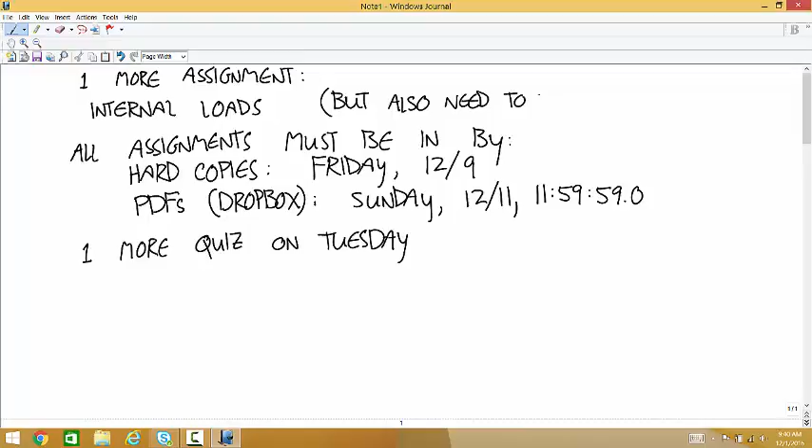And so, yeah, feel free. Anything you don't have in yet, get it in, and I'll give you full credit for it. Okay? I mean, if it's good. And then, what do we have left? Do we still have a quiz? On Tuesday, okay. One more quiz on Tuesday. And the one more assignment thing. There's one more assignment, but there's also one more set of things that you're responsible for on the test. You just don't have to turn them in. So you need to work through the friction problems. That's just not going to be submitted, but that's going to be on the last test. And then exam 5 is Thursday, 12/15 at 8 a.m.

Yes. Just have a question. What happens if something happened, like it was really snowing outside and my car was stuck? Because I'm always nervous about this. If I were you, I would just bring a sleeping bag on Wednesday. I'll bet you can find a place in the activity center where they don't look. It's not allowed, but I'm sure you can find somewhere to hide. I mean, I'm sure that they do have snow days, but I don't know. We've been pretty lucky so far this year. That would be the day, a snow day on finals week. That would be a disaster. I've been here 8.5 years now, and I've never had that happen. They don't close the school very often. Like, we never have snow days in Minnesota.

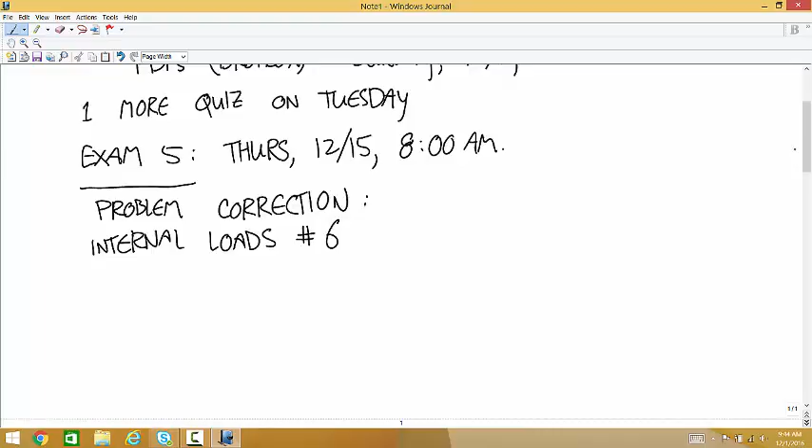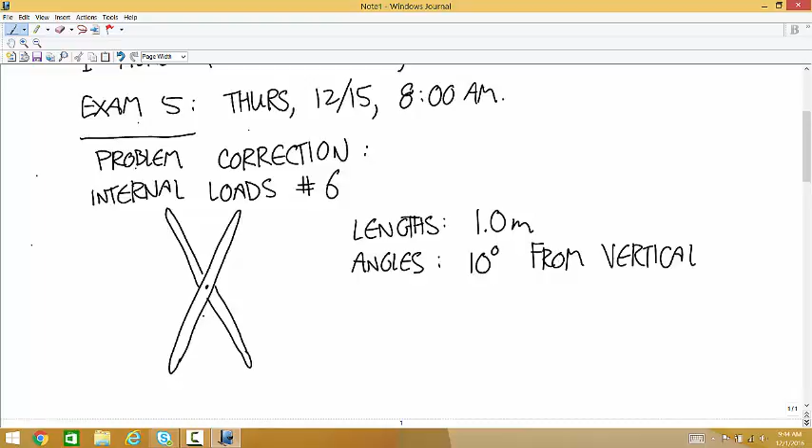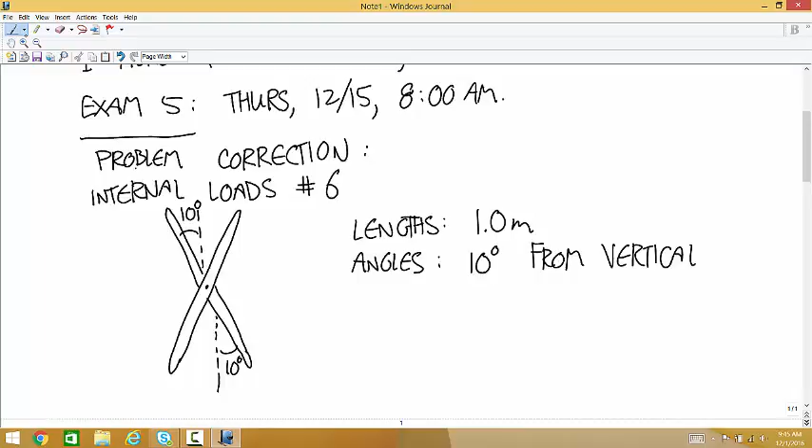All right. Any questions about any of the rest of the semester? Okay. There's one problem correction. I think it was number 6 in internal loads. It looks like you have these two members crossing. I don't remember a lot of details of the problem, but it doesn't give lengths and it doesn't give angles. So use the lengths being 1 meter, and the angles are both 10 degrees from the vertical. So this angle is 10 degrees, and this angle is 10 degrees. Do you happen to know what weight I used in the solution? Yeah, 400 kilograms. It's just a single beam. So the mass of the beam is 400 kilograms.

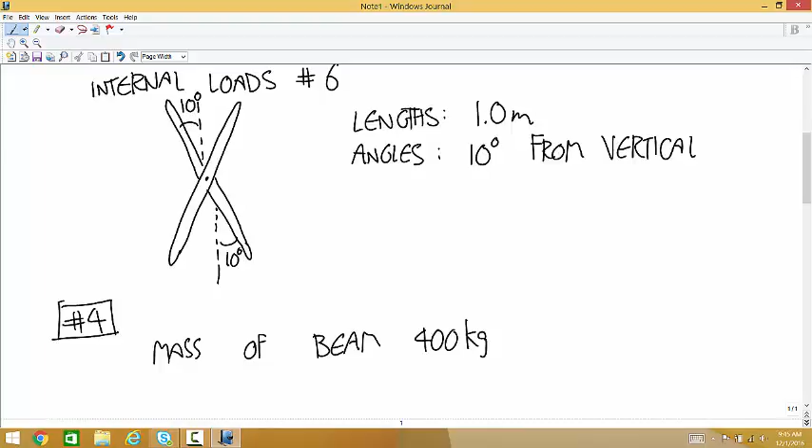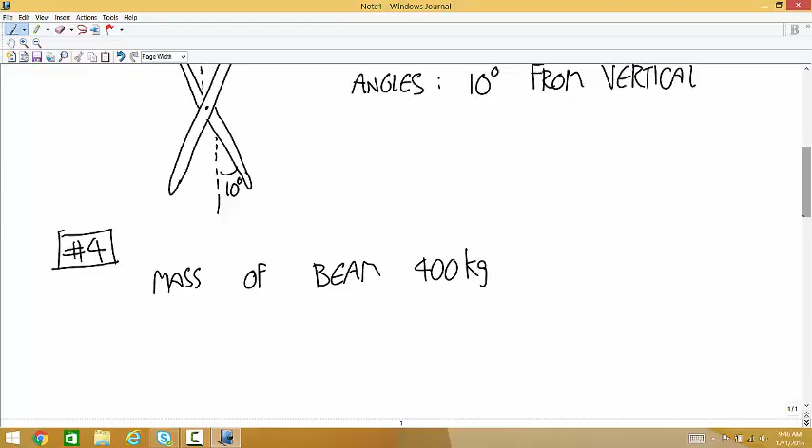That's a really heavy beam. Yeah, exactly. I guess what that means is that it extends into the page, most likely. Like you could have a wider plate made out of steel that could weigh that much. Yeah, but it gives it a length. It's just a 1 meter beam that weighs 400. So it has to extend into the page, exactly. Or be made out of neutron star. Okay. Any questions about assignment problems? All we have left to do is friction, and that shouldn't be too hard to get through in 3 classes. Anybody have it sitting in front of them? Internal loads?

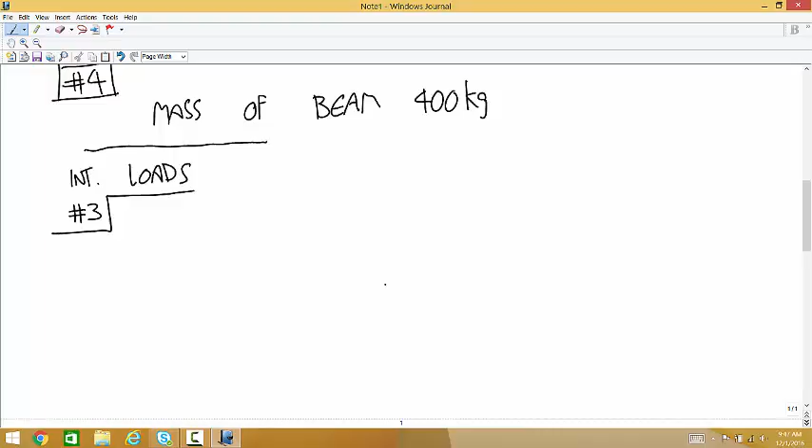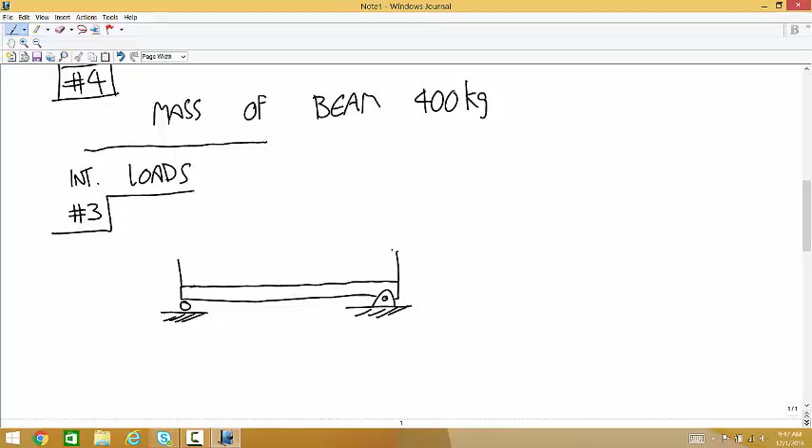3 is the one where it just... Okay, so there's a pin joint on the right side, a roller on the left side, and a rectangular distributed load all the way across. And there's no weight. The length is 3 meters. This is 10,000 newtons per meter.

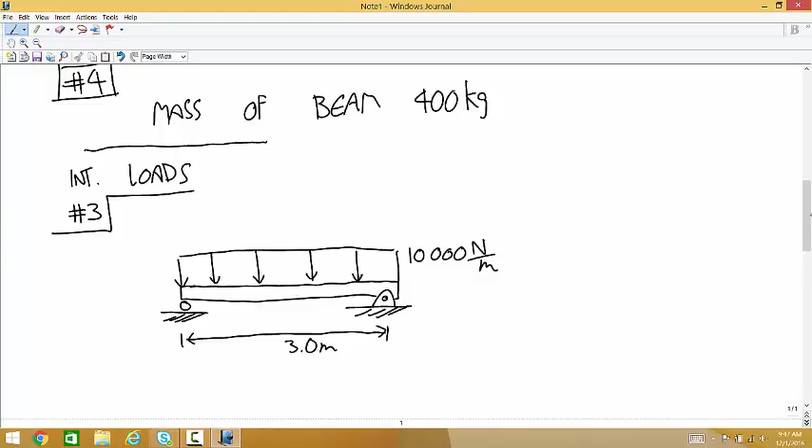The first thing you have to do is calculate the external loads. So if you think of this distributed load as a rectangle with a height of 10,000 and a width of 3, not drawn to scale, the total area is 30,000 newtons. The centroid's right in the middle.

So a free body diagram of the whole thing. At the pin, we have a full force vector. At the roller, we have a force pointing up. And then at the middle, we have a downward force of 30,000. Is it just safe to assume that that roller is right on the end? Yes.

So now you can write out the table, or for these horizontal ones, it's not too hard to just think through what's happening. So that's what I'm going to do. But with any rigid body problem, you can always write out that table if it helps you, including when you do those cuts, each one of those is a rigid body problem, and you can write out the table for those if you want to. This is sort of a shorthand. I'll put the about point here for the external loads.

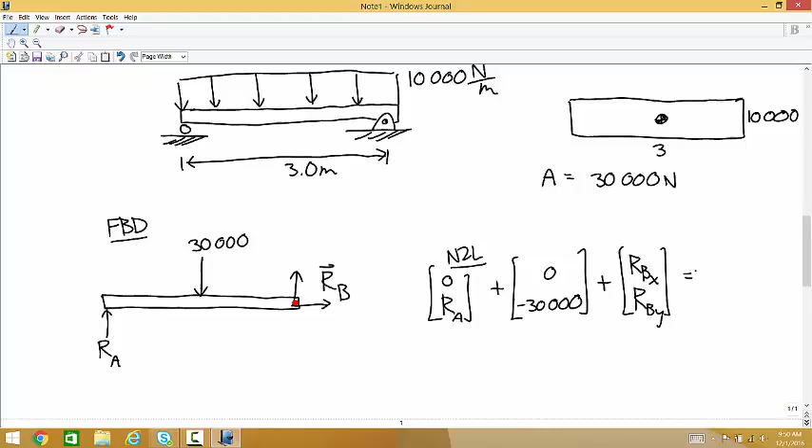So Newton's second law says (0, RA) plus (0, negative 30,000) plus (RBX, RBY) is equal to zeros. And the moment equation, there's no moment produced by RB. The 30,000 has a moment arm of 1.5. And would that produce a clockwise or counterclockwise moment around this hinge? Counter, so that's positive.

Wouldn't that be negative 1.5 with our coordinate system? Don't think of the coordinate system if you're doing it shorthand like this, by inspection; don't think of the signs of these values. Just think of magnitude, and then do the sign based on the rotation. Okay. And then RA has a moment arm of 3. Would that produce a clockwise or counterclockwise rotation? Clockwise, so that's negative.

So RA is 15,000. So RB is 15,000. Well, actually, I should have been able to see that. That's all just because of symmetry. Those have to be the same, and they each have to take half of that load. And so the vector RB is (0, 15,000).

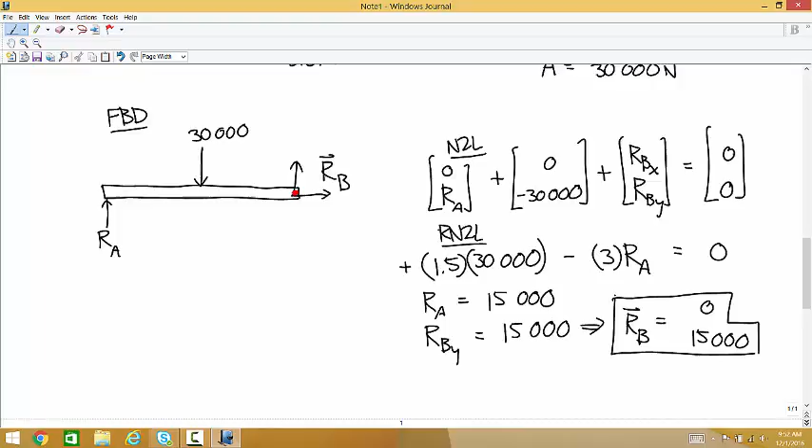Okay, so now the biggest danger to screwing up the cuts is that the last picture you drew is trying to mislead you about where to make your cuts. You look at this picture and you think endpoints and a point force in the middle, so that's n equals 3, you need 2 cuts, but that's wrong. This force in the middle is not a real force. That's a mathematical thing that we use to solve the problem.

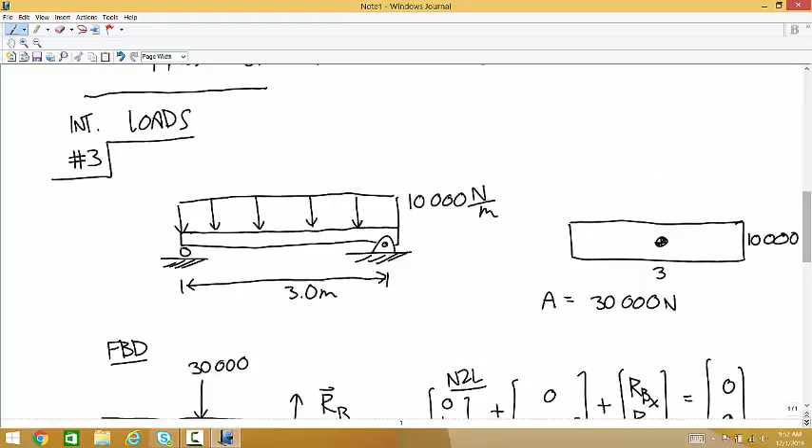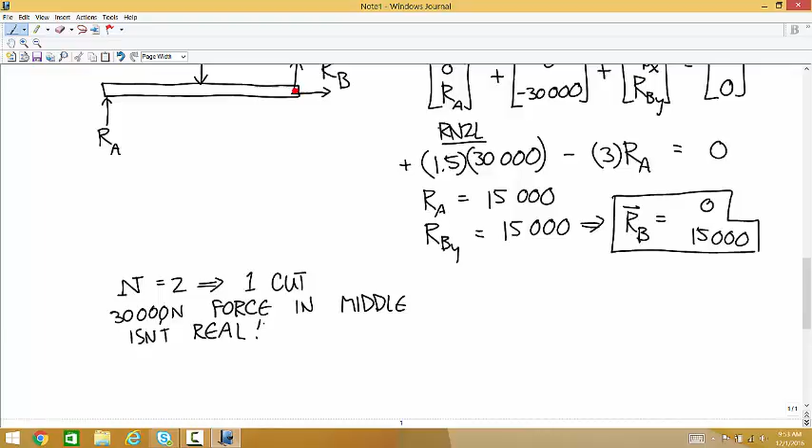So the real answer for how many cuts you need comes from the picture, or from a free body diagram before you treat that distributed load as a point force. And so based on this, we have the 2 endpoints. The distributed load function never changes, and so n is equal to 2. We only need 1 cut. That 30,000 Newton force in the middle isn't real. Okay, so our cut is valid for all x values. And I'm going to draw this in 2 steps.

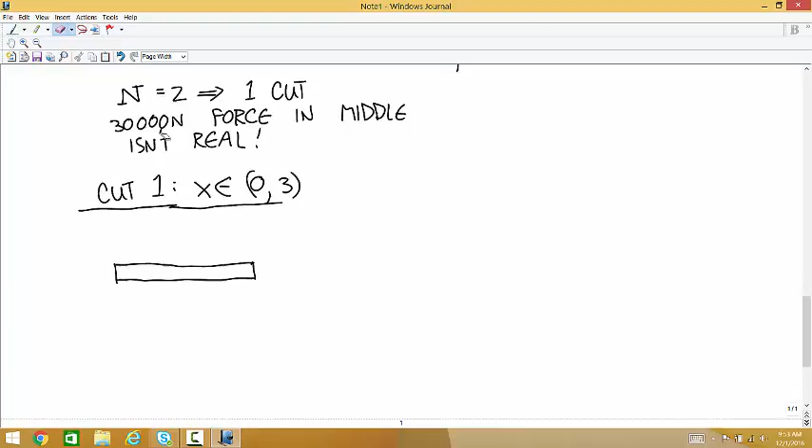Yeah, because there's not really a point force applied at the middle of this beam. There's really a distributed load. And so each time we choose a new cut, we have to treat this as a distributed load. So is it all over the beam, or we choose it to be a point force, but in reality the distributed load is all over the beam?

Right, it's all over the beam, and so we only go from the distributed load to treating it as a point force once we've chosen the cut, once we've chosen what body to isolate, which means every time we go to a new cut, we have to think of it as a distributed load again and recalculate what that point force is. Okay. Yep.

This is kind of piggybacking on the structures, right? When we were coming up with an overall force, typically that force is kind of prorated, or at least averaged along those given intervals we were calculating for, correct? So if you had something like 15,000 Newton meters over, let's say, 3 points, that would be theoretically 5,000 Newton meters at each point. Yes, that's right.

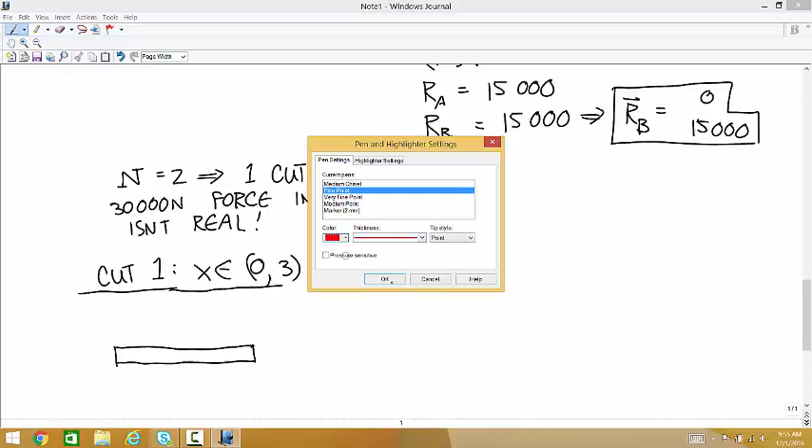Okay, so for the first cut, we're ignoring all the stuff going on here. You know, there's all this beam that we're not considering, and that beam includes part of that distributed load that we're not considering. We're only considering this piece and this piece of the distributed load.

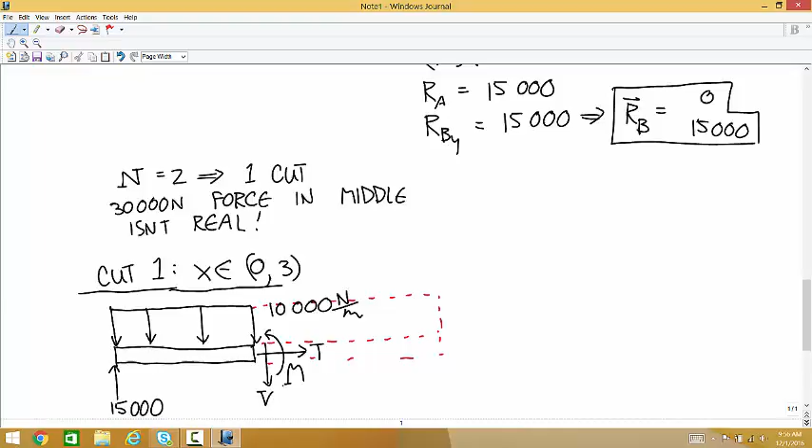Since this is a constant distributed load, a rectangular distributed load, the magnitude is 10,000 newtons per meter. We have an upward force from the roller of 15,000. And then we have the internal loads. And now that we've chosen a body to isolate, this point here is x equals 0. This point here is some arbitrary value of x that has to represent any choice between 0 and 3.

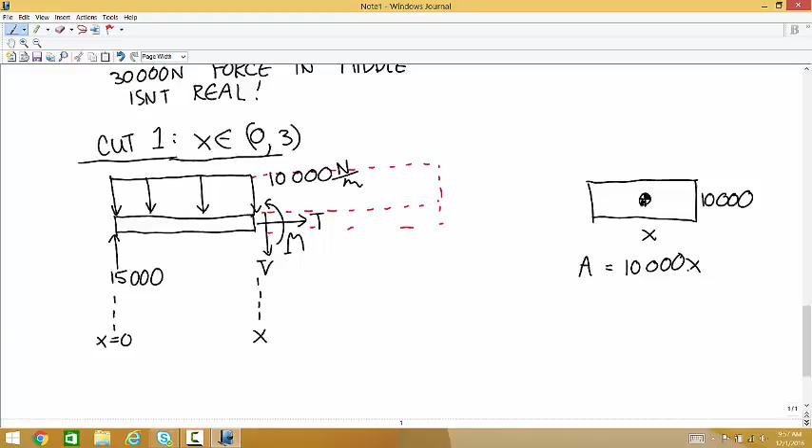So now our distributed load looks like this. This rectangle has a height of 10,000, a width of x. The centroid's right in the middle, or in other words, x over 2 from either end. And the area is 10,000x. So now I'll redraw this. We have a downward force of 10,000x.

Newton's second law says (0, 15,000) plus (0, negative 10,000x) plus (T, negative V) is zeros. So there's no tension. V is equal to negative 10,000x plus 15,000.

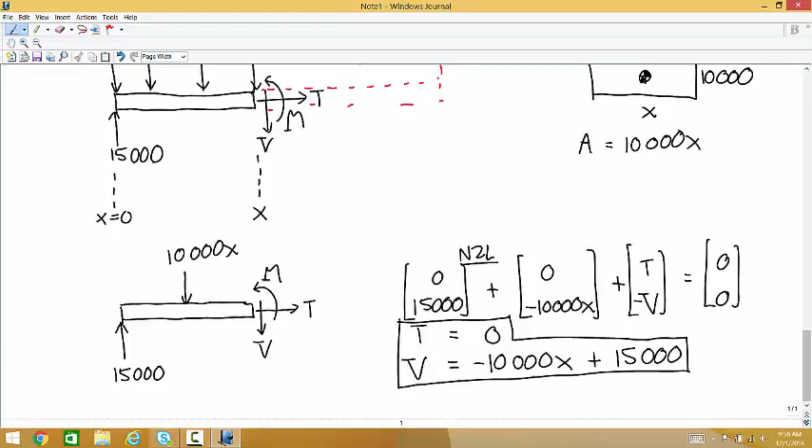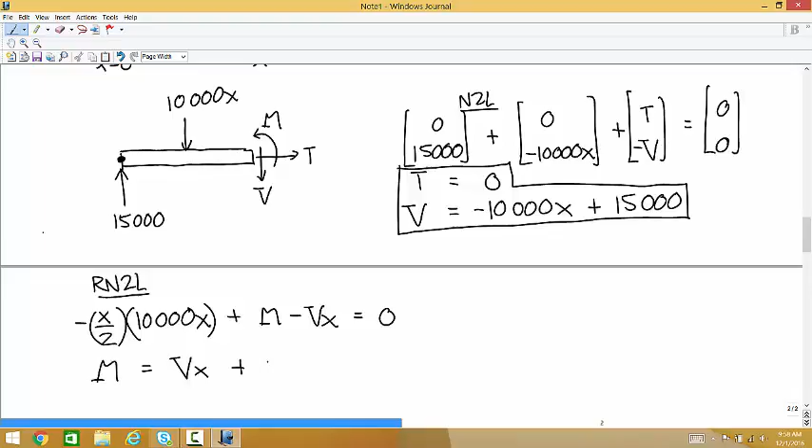And then the moment equation, our about point is over here, like always. So the 15,000 doesn't produce a moment. The 10,000, what's the moment arm for that 10,000? x over 2. Anyone have any questions about that? The magnitude of the force is 10,000x. Is that clockwise or counterclockwise? Clockwise, so negative. Yeah, because it's a new about point now. M minus Vx is equal to 0. So M is equal to Vx plus 5,000x squared.

Substitute in V here, and you get negative 10,000x squared plus 15,000x plus 5,000x squared. When you add up the negative 10,000x squared and the positive 5,000x squared, you get negative 5,000x squared plus 15,000x. Do the derivative checks. dM/dx, negative 10,000x plus 15,000 equals V, so that one works. And then dV/dx is negative 10,000. Negative dV/dx is positive 10,000.

And that's the q. We choose x as an arbitrary length, like we chose it in the middle before, but now we choose it any length between? Right, it has to represent this whole interval of lengths in between those key points. Yeah, like 0 and 3, but it could be any length? Yes.

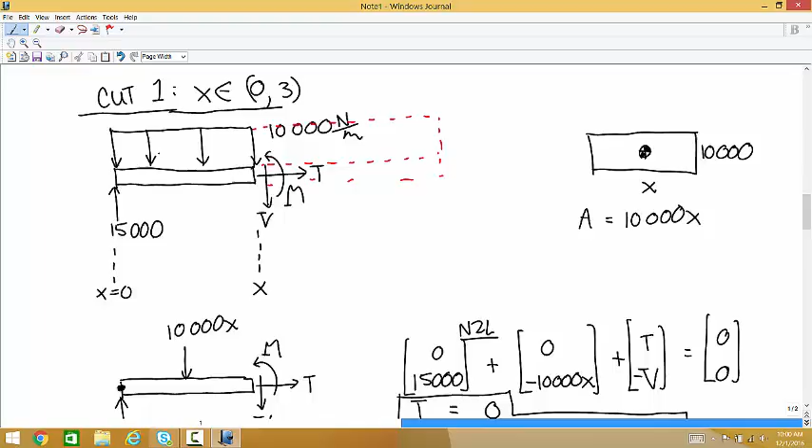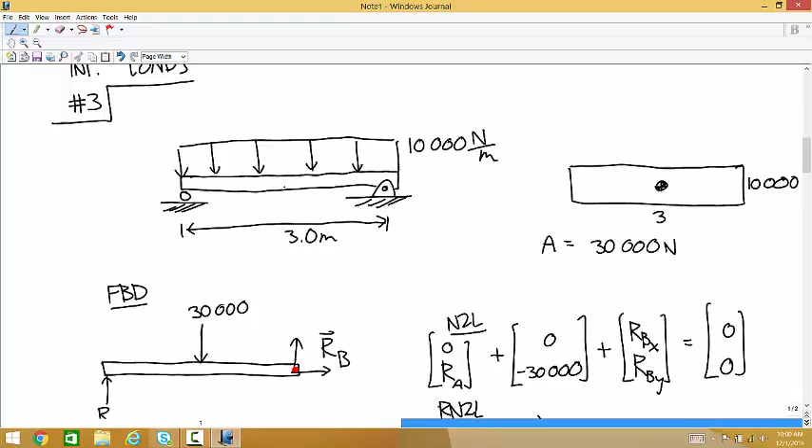So what this says is that, well, I don't even want to have the internal loads for the whole thing. I only want the internal loads at x equals 2.4. And so then you plug 2.4 in for x, and it gives you the internal loads at that point. And if you go back to the first example we ever did, before we started representing these lengths as x, we just chose a value and calculated the internal loads. If you did it that way, just did it as x equals 2.4, you'd get numeric values, and they would match what you get from these functions by putting 2.4 in.

Yes? Where did the x over 2 come from? That came from the centroid. So this is x equals 0. This is x. The centroid's right in the middle, so it's like the average of those two values, so x over 2. You know, either one of these two distances is x over 2. Any other questions about that one? Any other internal loads questions?

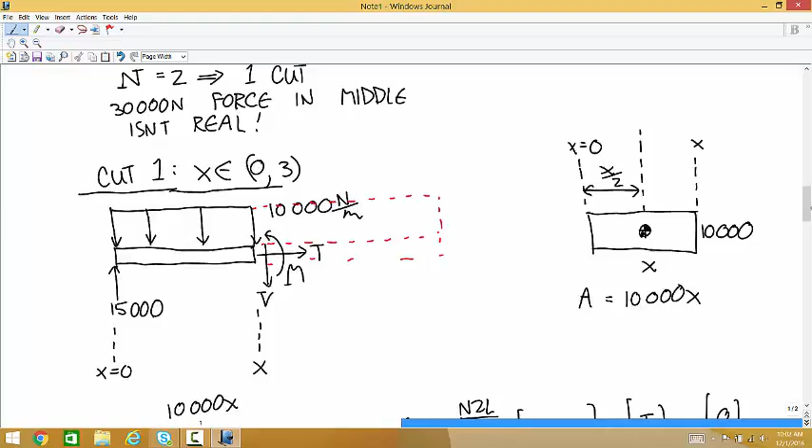Yes? Yeah, so 3B, the beam is cantilevered on the right. That's what we always like to see because it means we can be lazy about calculating the external loads.

So just a quick question. The last example, when you say calculate the T, V and M diagrams, is that what we're looking for? Then plot them? Oh, one says calculate, the next says graph them. Actually, yeah, that wording is weird. Like, do you want us to calculate those functions or draw the diagrams? Whichever one you want on that one. The wording isn't good. You don't have to do the diagrams for that one. Do the diagrams for the ones where it says graph it out. But don't do it by hand. That would be insane. Just go to like Desmos or use Excel or something and plot those. You know, use a plotting function to do that.

I don't have it in front of me. What about it? But like 3A, B, and C said to calculate. Yeah, so any that say calculate, just do the functions, that's fine. The ones where it says plot a graph or graph the functions or whatever, give me the graphs on those. But yes.

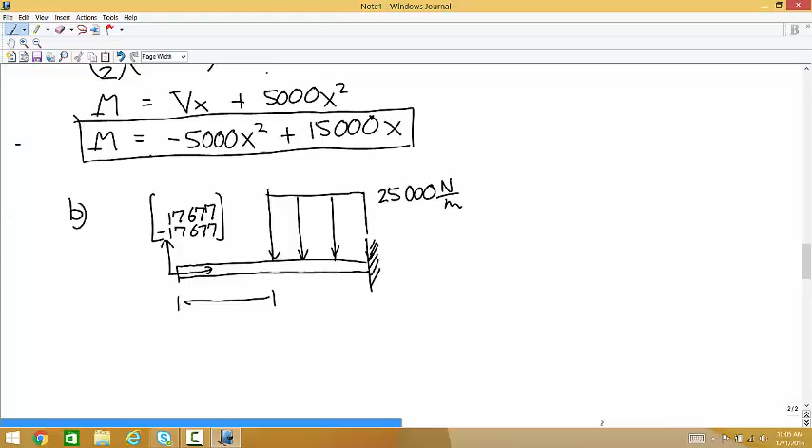Well, we can right now figure out how many cuts we need to do. So there's the two endpoints. And then in between the two endpoints, are there any point forces? No point forces. Any places where the distributed load function changes? This one, that distributed load does change at the middle. So n is equal to 3, and so we're going to need 2 cuts. And like I said, we can skip the external load calculation and just go right to the cuts. So cut 1 is for x values between 0 and 0.5.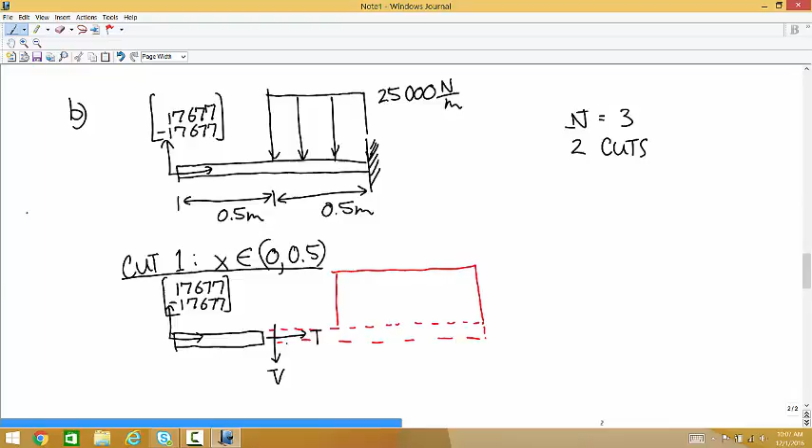So we're leaving off a whole bunch of beam, and we're leaving off the entire distributed load. All we have acting are the point force on the left and the internal loads. So Newton's second law says 17,677, negative 17,677, plus T, negative V is equal to zeros. So T is equal to negative 17,677. V is equal to negative 17,677.

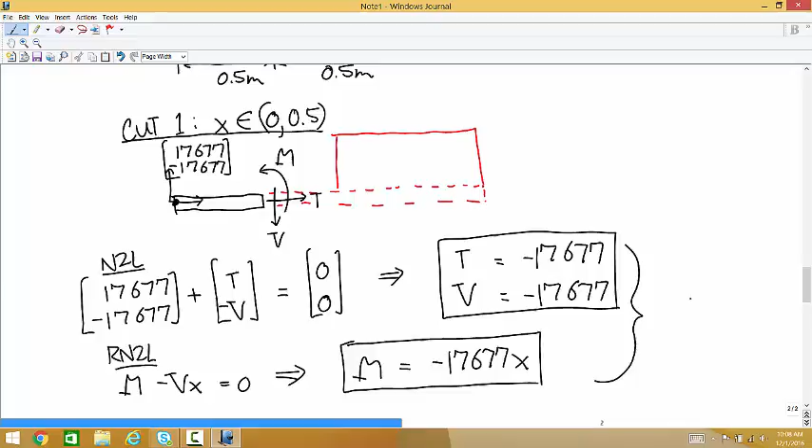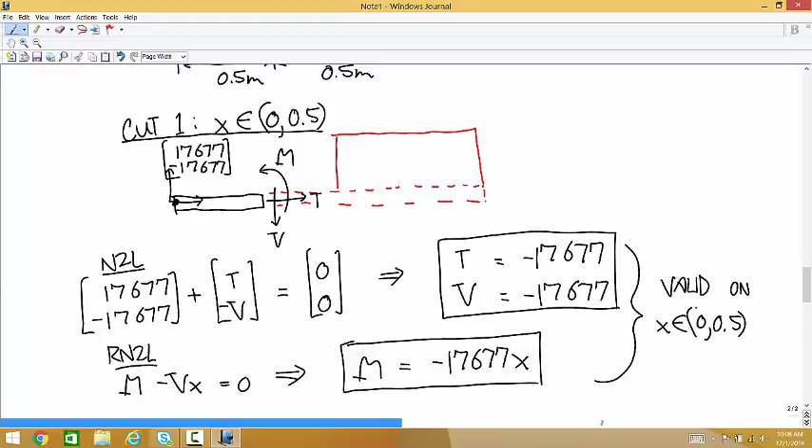The moment equation, the about point is at the left, so all we have is plus M minus Vx equals 0. So M is equal to negative 17,677x. M is equal to Vx, and then V is negative. And these are valid on the interval x between 0 and 0.5. And then the second cut is valid for x values between 0.5 and 1.

We're leaving off some amount of beam like that. And so we have the force over here at the left, 17,677, negative 17,677. We have the distributed load of 25,000. And then we have the internal loads. And now that we've made the cut, we can treat that rectangular distributed load as a point force. It has a height of 25,000.

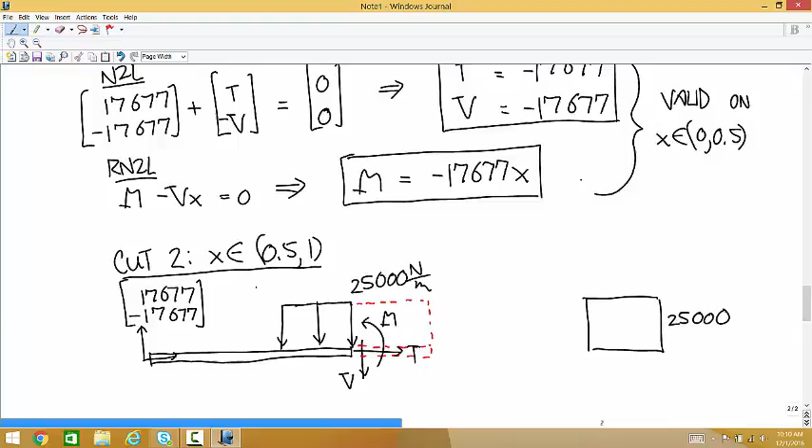Its width, you have to think about it a little more this time. So let's think about these locations. This is x equals 0. This is x equals 0.5. And this is x. So what's the length of this rectangle? X minus 0.5. And the centroid's in the middle. So if the centroid is here, what's the distance between x equals 0 and that centroid?

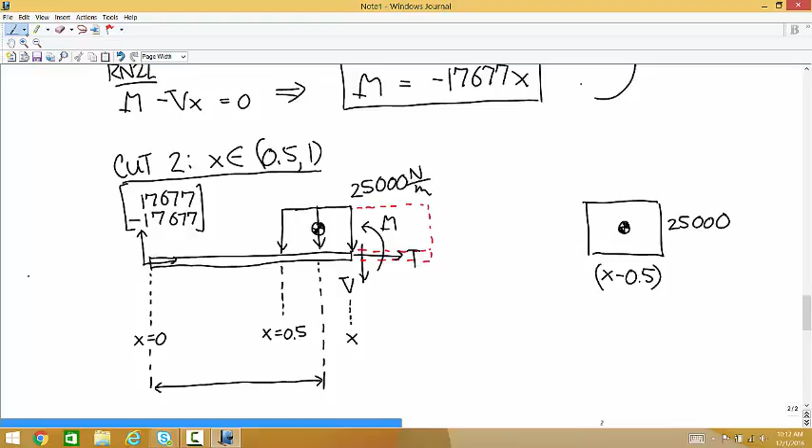That's right. So there's two ways, I think, that make sense to think about it. One is where you think it's 0.5 plus half of that length. And the other way, the way I like to think about midpoints, is just average the 2 points. So the average of 0.5 and x. So this length then is 0.5 plus x divided by 2, and the area of that rectangle is 25,000 times quantity x minus 0.5. That's 25,000x minus 12,500. And I'm going to rewrite this one as 0.5x plus 0.25.

So now I'll redraw this piece of beam. We have the force over here, 17,677, negative 17,677. And we have the point force that has a magnitude of 25,000x minus 12,500, where this distance is 0.5x plus 0.25. And then we have the internal loads.

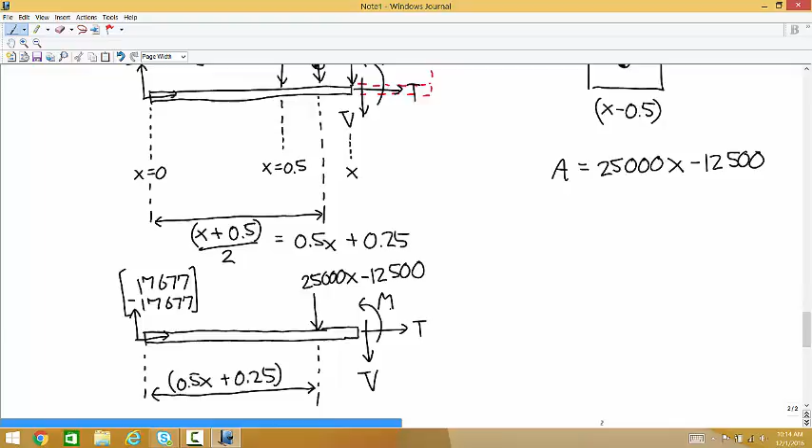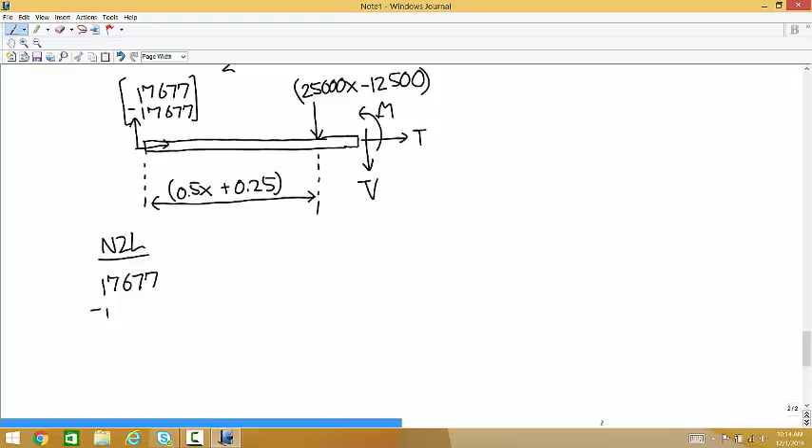And you're going to have to distribute out these polynomials when you calculate the moment, because you're going to have this moment arm there, this force there. But I think you're up to it. Remember FOIL? Okay, good. So Newton's second law says 17,677, negative 17,677,

plus, okay, so now this is a magnitude. You can see this is a positive number and it's pointing down. If you get confused about whether that's a positive or negative number, plug in a value of x. So that's a positive number pointing down, which means we're going to multiply this magnitude times the unit vector 0, negative 1, which means that we have the opposite of this in the y direction. So I'm going to write it as positive 12,500 minus 25,000x, plus T, negative V.

So T is equal to negative 17,677. V is equal to negative 25,000x minus 5,177. Oh, yeah.

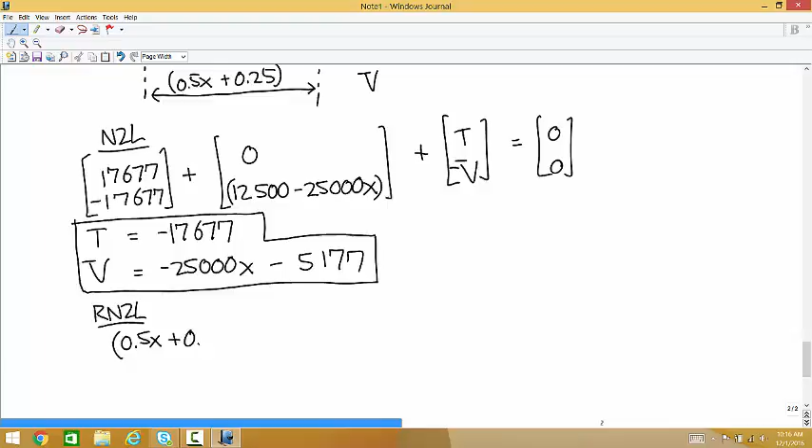And then the moment equation. This is our about point. No moment produced by the force on the left. But then we have this ugly thing. It has a moment arm of 0.5x plus 0.25. The magnitude of the force is this, 25,000x minus 12,500, then plus M minus Vx is equal to 0.

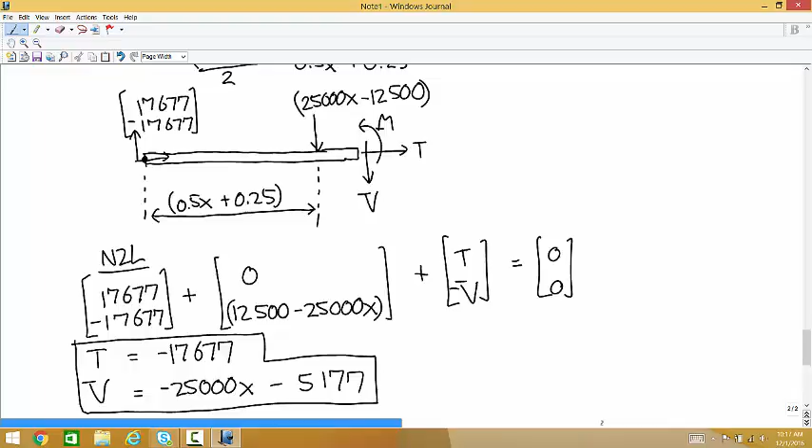So it's clockwise. Oh, yeah, I didn't think about that. Yep. So we have the moment arm, the force, and now we have to think about the direction of that rotation. That would produce a clockwise moment. So I didn't give that the right sign. Okay, that's probably enough. But yeah, so you have to FOIL that out, calculate M. It's just a lot of bookkeeping, algebra stuff. I ain't doing that.

Do we need to find the internal loads for number 2? It says reaction loads. The idea is the internal loads. It's more practice. It's worded wrong. So if you only calculate the external loads, I won't mark it wrong on your homework. But it's more practice. I think the solution calculates. Do you know? Have you looked at the solution for that one?

Okay. So the problem is, I rearranged a lot of these problems, and so some of the problems ended up in the wrong problem sets, little by little. It's a slow, iterative process to iron those things out. So that one was probably originally a problem for rigid bodies, and it just ended up here by mistake. Or it might be a problem for rigid bodies and you just forgot to add part B. Right. One of those two is definitely what happened, yes.

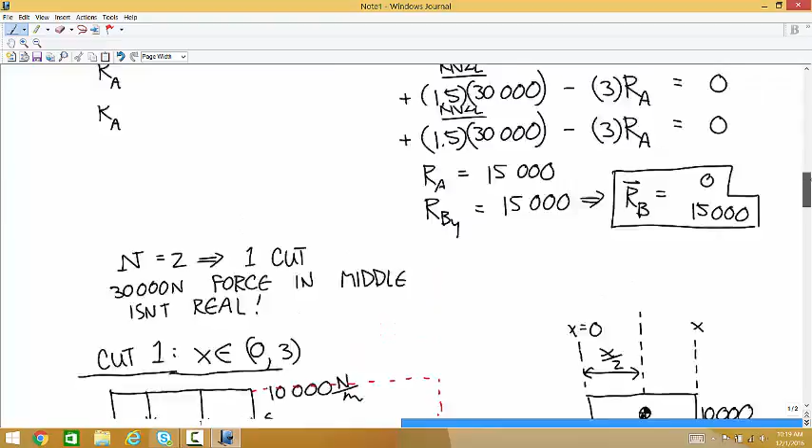So why do we have two cuts? We have distributed load and we have n equals 3, and the other one we have n equals 2. Because that n counts up these things: endpoints, point loads, well, it's counting up points. And those points add up if they are endpoints, and or locations of point forces, and or locations where distributed load functions change. And so in 3A, that distributed load function never changes. In B, that's the difference. So in B, that distributed load function changes at the middle from 0 to Q equal 25,000, and so that's why that point at the middle adds an n.

I was just going to wonder if there's any time you'd ever want to use a unit step function for something like B, for Q. Oh, I can't think of a way that would help, but I think that's just a difference in representation. So if you think about it and come up with a cool new thing, I'd love to hear about it. So if it's distributed load through the whole beam, we won't count it as a cut. Right. But because it's in the middle, like 3/4 or 1/4 of the beam, then we count it. Yes.

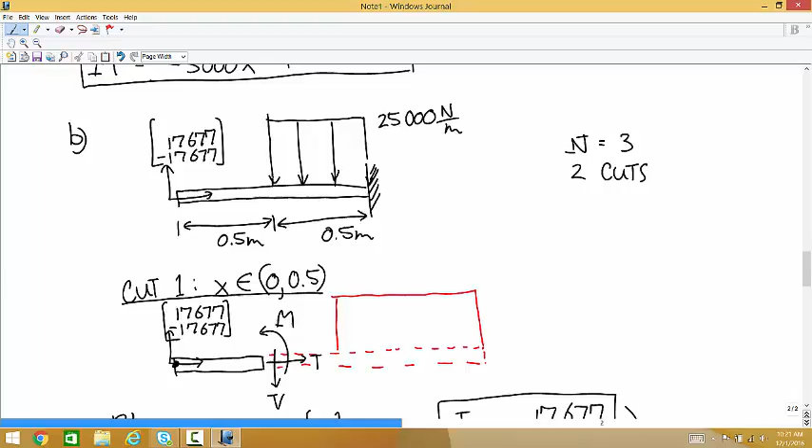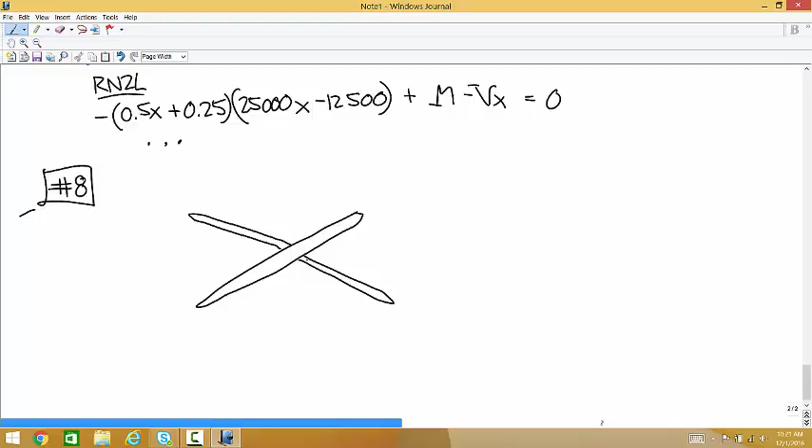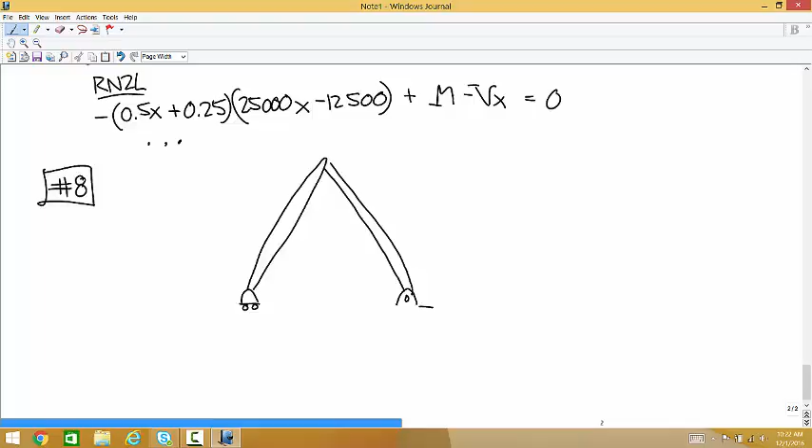I don't want you to do a whole question, but on number 8, they're on an angle, and I'm a little confused about the theta being rotated. Okay. So remind me, are they at sort of a shallow angle like this? Can I see it? Oh yeah, that's not it. It's a triangle. So it's a structures problem. These angles are 70 degrees. You have a downward force of 10,000. Horizontal force of 5,000.

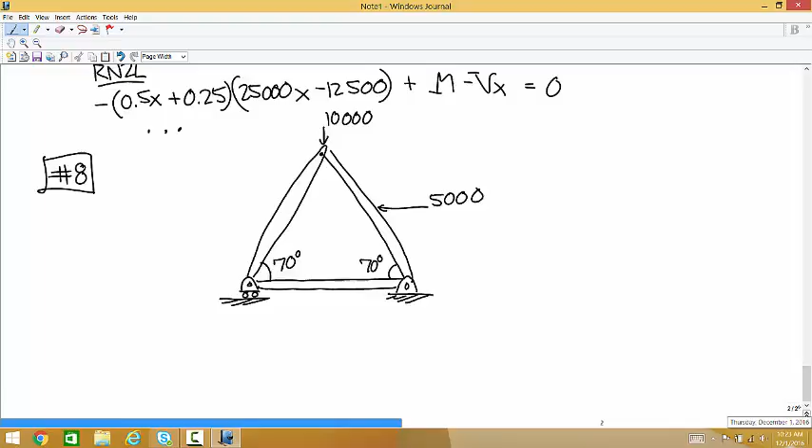So first you go, yes? Oh, in the solutions, which should I do? Okay. Yeah, there's that gap there like it's supposed to be. Okay, one more thing. So once you calculate the external loads, and these don't have masses, right? So you end up with one force down here. I'm going to just call that F1. Once you combine all these forces going on, it's a two-force member.

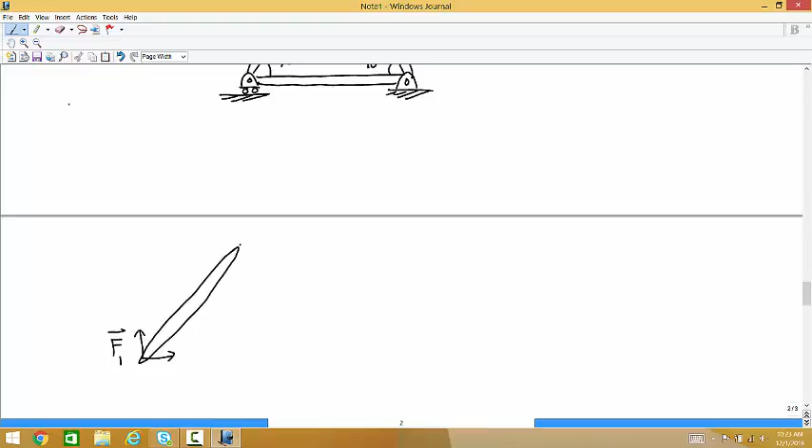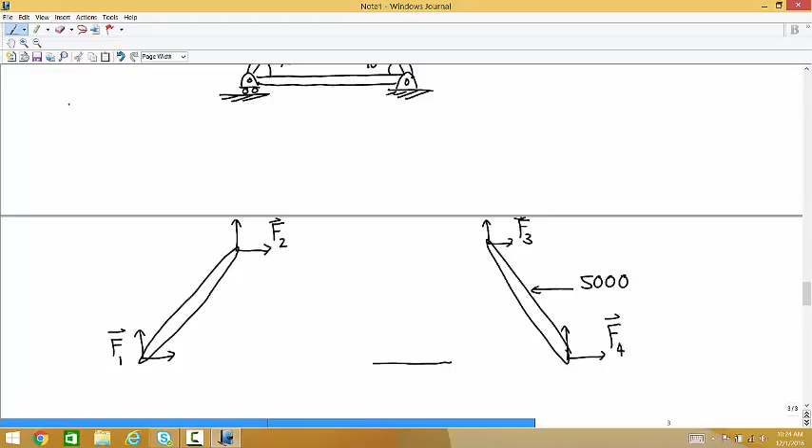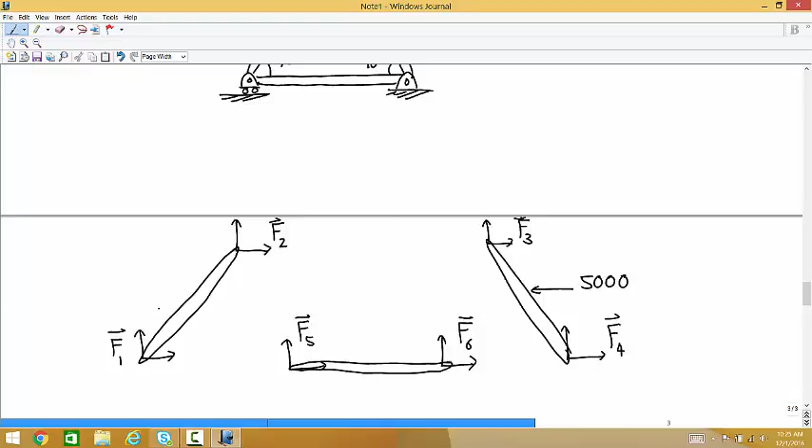Over here, you have F3, 5,000, F4. Yeah, everything's lumped together. So these are not the free body diagrams you would use to solve for the external loads. This is just what you have going on after you calculate the external loads. I have a question. Do we switch the coordinate system? Yeah. So for the next step, and that's what she was asking about. So let's call this member 1, this member 2, and this member 3.

So for member 1, okay, so for these members, is there anything you could do to sanity check your external loads? On 1 and 3, they need to be equal and opposite, and they have to be parallel to the beam. On 2, there's not as much you can do.

Do you need to include a force from the roller on the wall? Yeah, I don't know if I should have done the free body diagrams this way. So my idea when I did this is that 10,000 is lumped in here, the roller force is lumped in here. But what you end up with is external loads that when you add up all the loads acting here and you add up all the loads acting here, you end up with equal and opposite forces parallel to the beam. Same thing here.

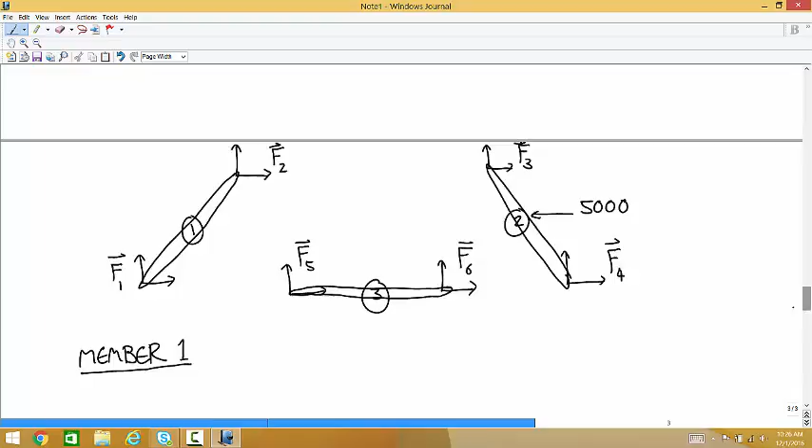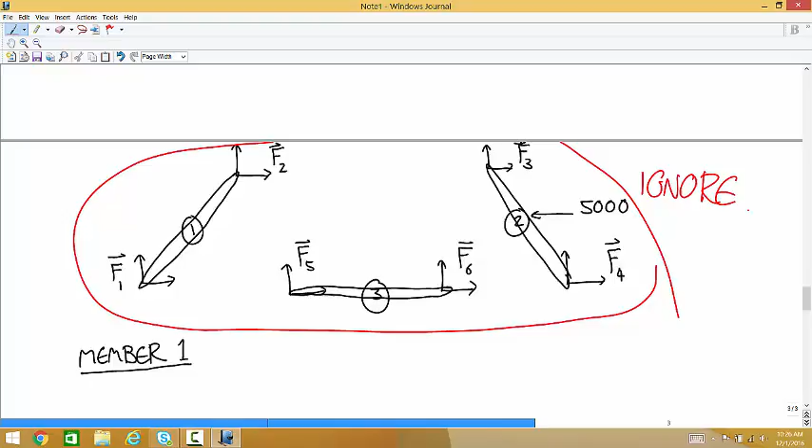Those are just space holders, yeah, right. So F1 and F2 are equal and opposite? Or number 1 and 2? Yes, you're exactly right. Okay, don't change anything you have been thinking about up until this point based on this diagram.

Okay, so member one, we're going from a coordinate system like this to a coordinate system like this. Most likely, although if you wanted to use this coordinate system, you could figure out that rotation.

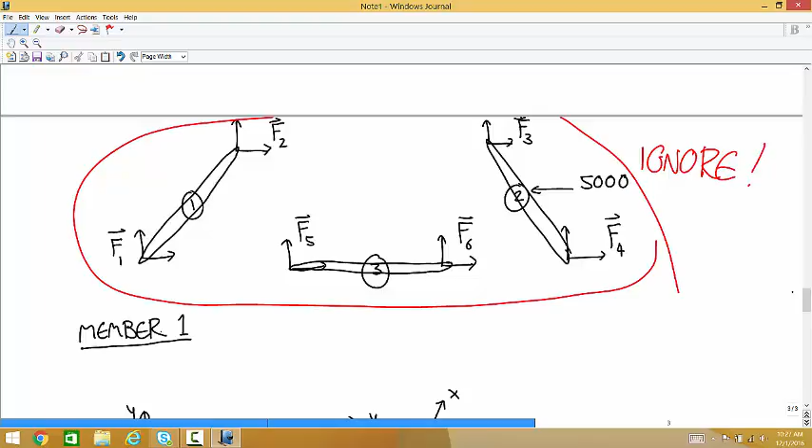You said X always goes in the line of the axis of the beam. Yeah, the X always goes along the beam. That's right. Doesn't matter which direction, right. But it always points from your starting, your X equals 0, your first cut, towards the end of the beam. So if you choose to do it with your x-axis that way, that has to be the left end of your beam when you start your internal loads. You know what I mean?

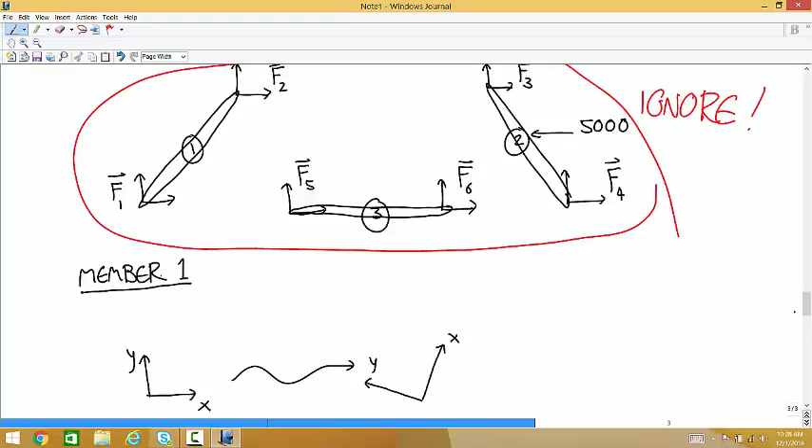Okay, so what's the angle theta for this rotation? Yep, positive 70. So why is it 70? Did it rotate counterclockwise or clockwise? Counterclockwise is positive. Oh, so it rotated counterclockwise. The coordinate system rotated counterclockwise 70. Oh, okay.

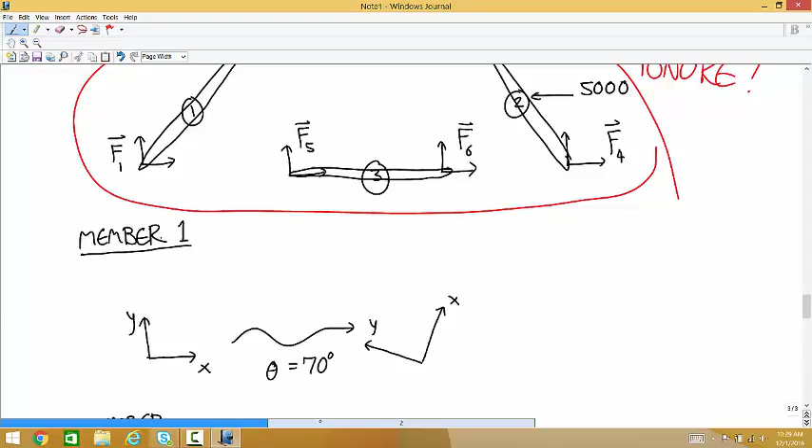What every single one of you is going to screw up at some point in your life is thinking that you want to take this beam and rotate it down like that. Yeah, when you rotate the coordinate system and then you turn your head, you don't rotate the member.

Okay. If any of you retire from engineering at 70 or whatever, and you haven't screwed that up at some point, let me know. You're optimistic. Yeah, let me know. And I'll give you something nice.

But this is something you have to keep fighting against actively, because your brain is going to want to do that. You're rotating the coordinate system, not the body. So basically, you have a system like that, you rotate it to the regular one, or vice versa? You're going from the regular one to the one with the x-axis along the beam. Okay, so if you're going this way, you're going right down. Oh, okay, I see why it's turned this way. This is because I saw the X and Y differences.

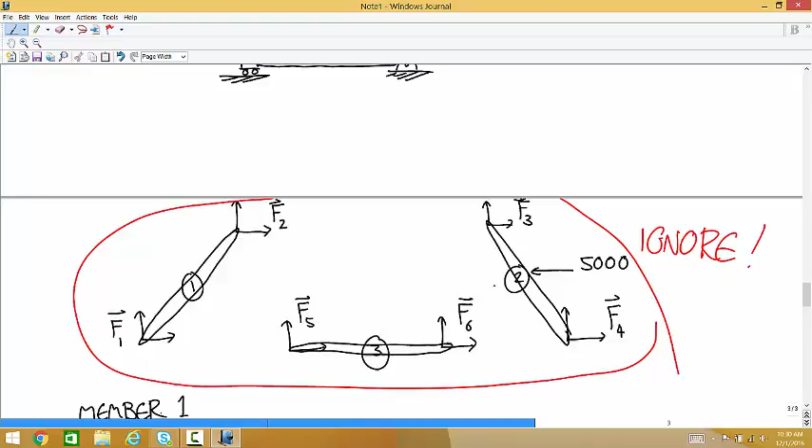Member 3, you don't have to rotate. Member 2, well, which way? You get to choose. I suppose, I don't know. I probably just always do it with the smallest angle I can, but there's no reason that that's any better or anything. So you go from this.

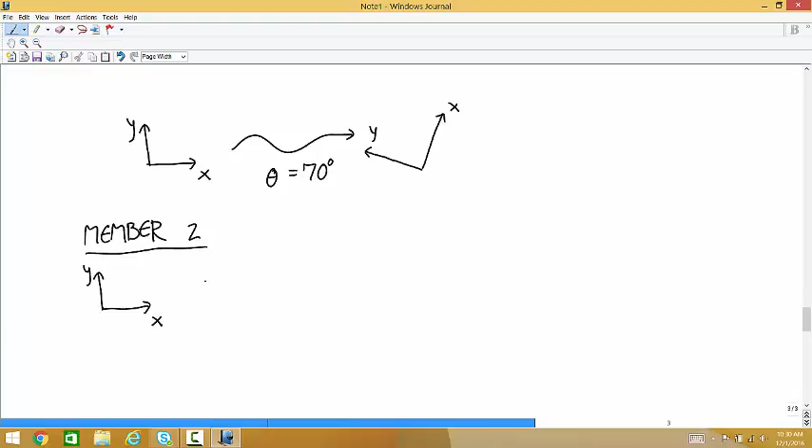You're out. You're out of the running for something nice when you retire. But I want to remember that, because I feel I'm gonna forget. Yeah, you are. Nothing personal, but you are.

Okay, so we're doing a rotation like this, and so theta is negative 70. Yep. All I can say is just keep reminding yourself. The more you remind yourself, the less it'll happen. Yeah, because when you told us about that, I thought about the beam, but then I remembered that. Right. Yes.

Oh. What do you mean cancel out? Like, if you add, one is going that way, one is going this way, so it's going to be static equilibrium. Oh, yeah, they have to be in static equilibrium even after the rotation. If that doesn't happen, then something went wrong.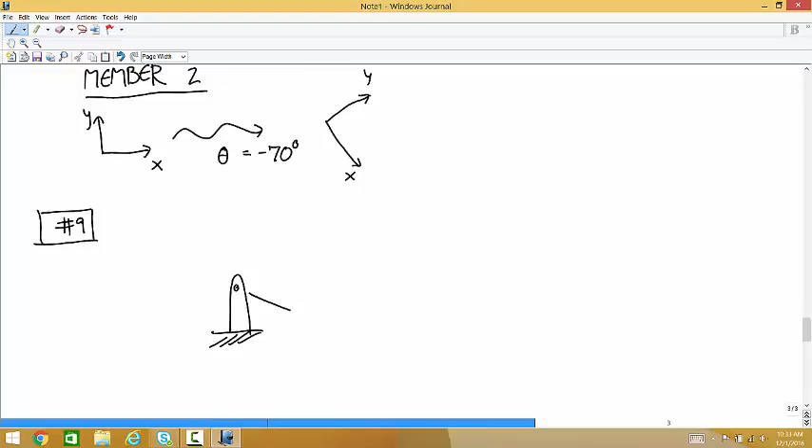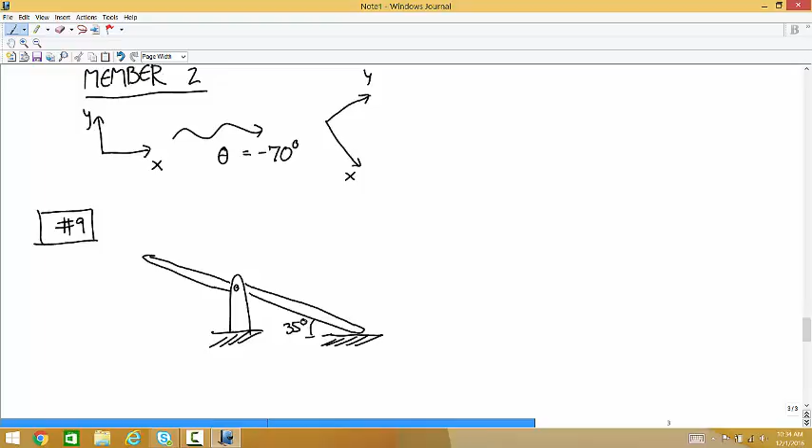Any other problems? Let's just keep doing problems. We only have 15 minutes left. Is there a good one? You want to do number 9 because that's one where you have to use the rotation matrices and it's not going to be too long. Yeah. This angle is 35 degrees. The length is 1.5. There's a 10,000 Newton force.

Whatever. 10,000 Newton force here, down. It doesn't say anything about this contact. That could be frictionless or friction. What are we going to use? Frictionless. Why? It's not just easier. If we treated that like a friction contact, this problem isn't solvable.

We only have one rigid body. We only have 3 equations, so we can only have 3 variables. Yep. By the way, do we know where the 10,000 is? Right in the middle. So if we just deem that to be a friction contact, we just say the problem isn't solvable? You can do that. I mean, it's a free country, but it doesn't go very well when you do stuff like that. Is it stated in the problem that it is exactly at the midpoint? Yes. Okay.

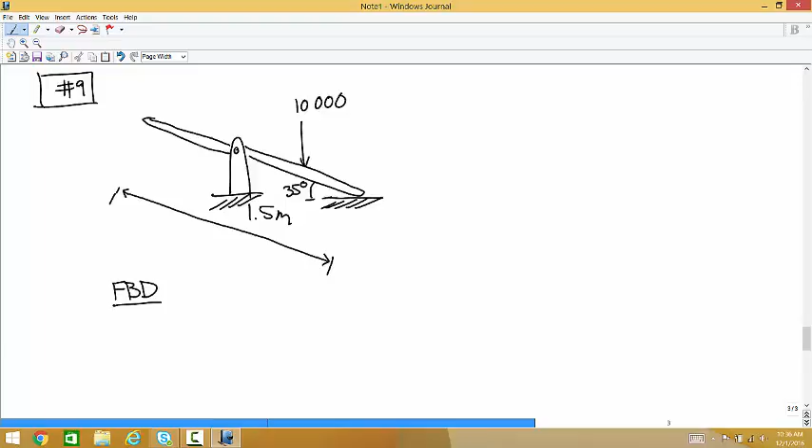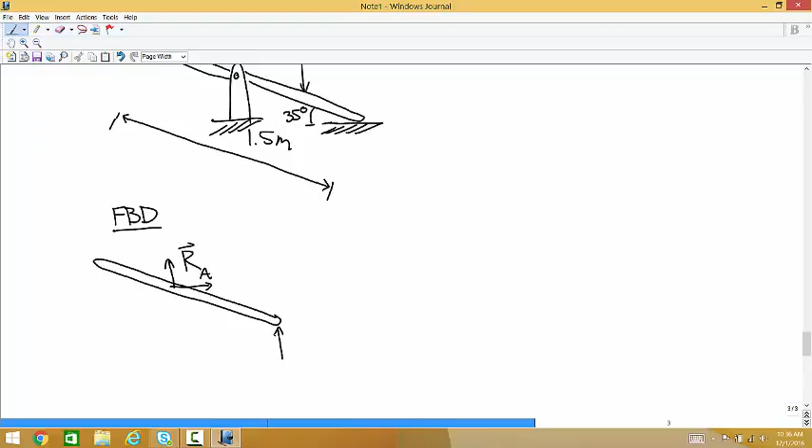So mostly we assume that we don't include friction only when there is like internal load or that? No. If the problem can only be solved with frictionless, you assume frictionless. Okay, so free body diagram. The pin joint in the middle creates a full force vector. The contact over here, now that we know it has to be frictionless, that's just a force in a known direction. And then we have the downward force of 10,000.

Let's put the moment about a point in the middle at the pin. So the r vector from the pin to the end is going to be 0.75 times cosine and sine of negative 35. Can someone tell me what that is? 0.75 times cosine and sine of negative 35 degrees. What is it? That's the sine? Negative? Are you in radians? Okay. Do you know that many trig identities off the top of your head? I just know the quadrants. 1, 4, and then the y. Okay.

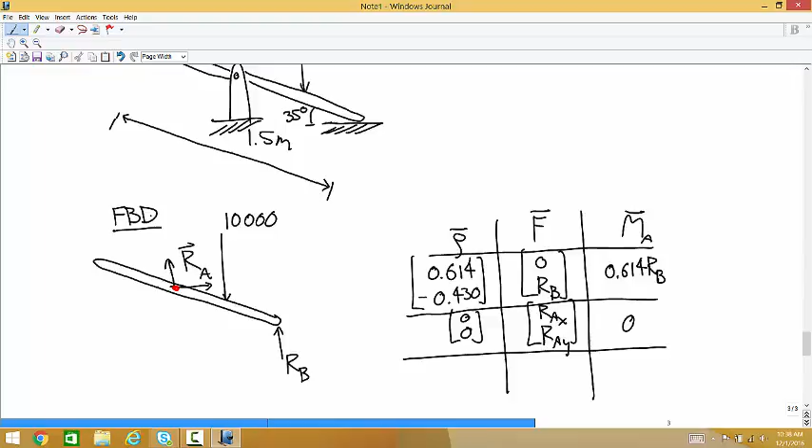The force vector is 0, RB. So the moment is 0.614 RB. RA has no r vector. We haven't started using the r-cross-F shortcut? Yeah, you can. It's a little, you know, when this thing isn't horizontal, it's a little more of a hassle. It's easier when the beam is horizontal. That's when I tend to use it, or vertical too. But when it's at an angle, then you have to do the trigonometry for each one and stuff.

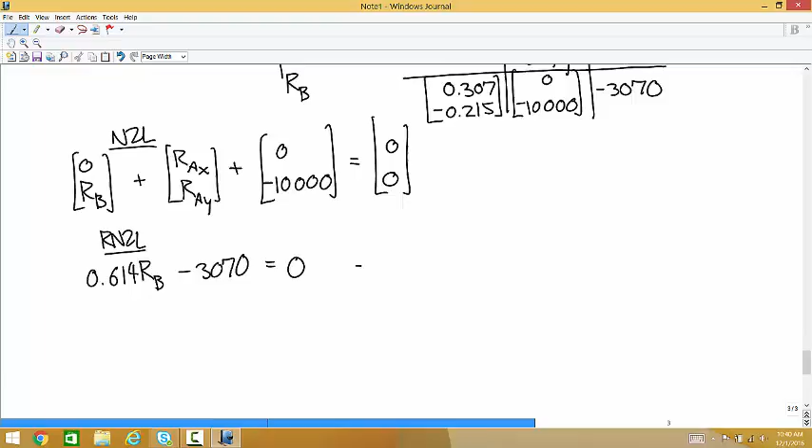Okay, and then the last one, I guess, is half of this, so 0.307, negative 0.215. The force is 0, negative 10,000. So that's negative 3,070. Newton's second law says 0, RB plus RAX, RAY plus 0, negative 10,000 is zeros. The moment equation says 0.614 RB minus 3070 is equal to 0. So what's RB? Ooh. 5,000? And then that means RA is 0, 5,000.

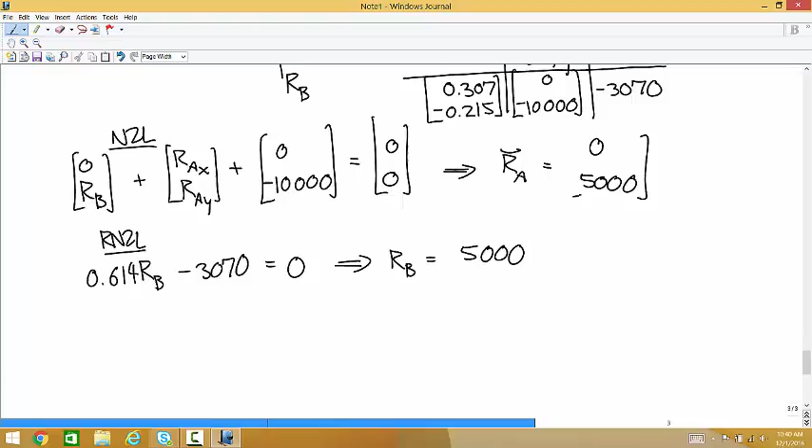Okay, so now to do the internal loads, we're going to go from a coordinate system like this to one like this. So what's the angle? Yeah, negative 35 degrees. And so the rotation matrix is cosine of negative 35, sine of negative 35, negative sine of negative 35, cosine of negative 35. What's cosine of negative 35? 0.819. And what's sine of negative 35? 5.7 what?

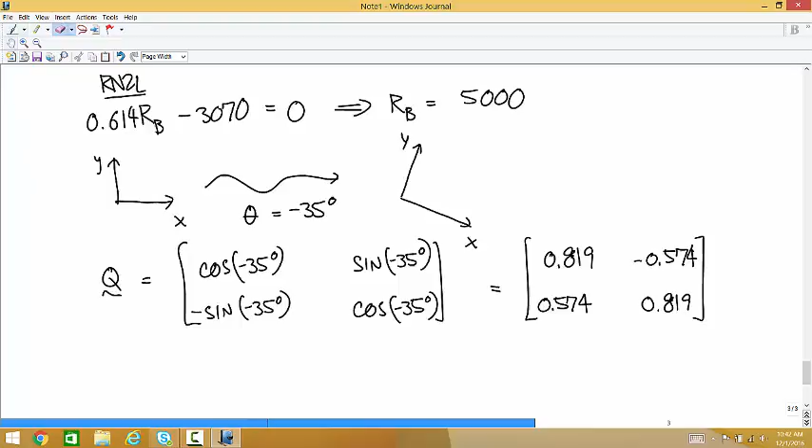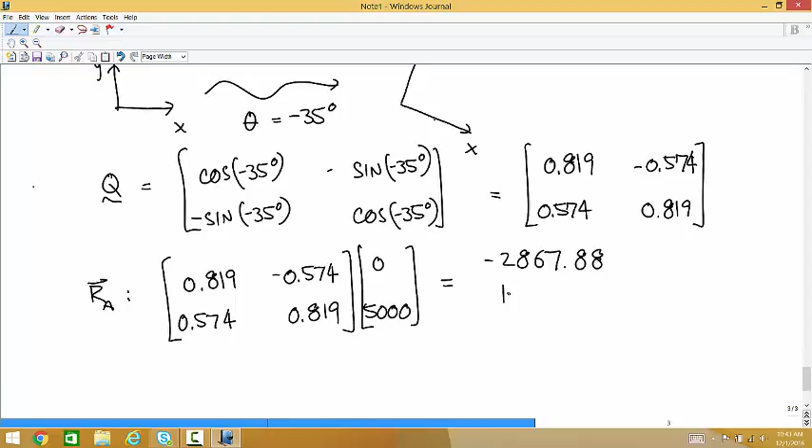And now one by one, we're going to multiply that by the forces. So RA, we have 0.819, negative 0.574, 0.574, 0.819, times 0, 5,000. Can someone multiply that? Negative 2,807.82. Wait, oh, I put a 0 in there for no reason. 2,867.88. Okay. And then 4095.76. Okay. And then we have the 10,000. As a force vector, that's 0, negative 10,000. And I guess that's going to be whatever 2 times this is. 5740, and negative 8190. Round off error.

And then RB is this matrix times 0, 5,000 again. So negative 2867.88, 4095.76. Okay, so now we have a rotated beam with a rotated coordinate system. How do we translate that into a horizontal beam? Rotate your head. Yeah, right, turn your head, yeah. Very good.

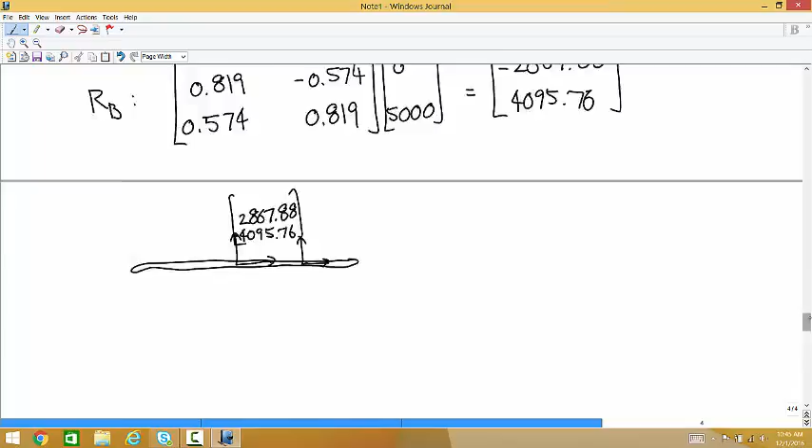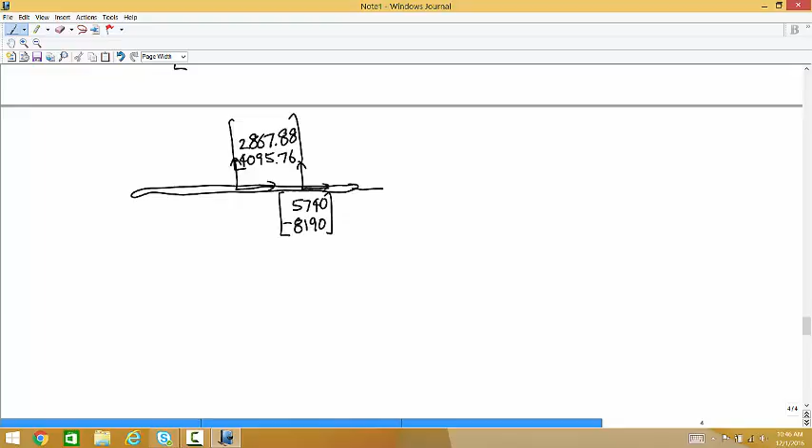So we have nothing until the midpoint. At the midpoint, we have a force of 2867.88, 4095.76. Halfway between that and the end, we have a force of 5740, negative 8190. The round off there is kind of egregious. And then over here we have, oh, I missed a negative sign here. And then the last one is negative 2867.88, 4095.76. These are all actual point loads. None of those are representing distributed loads.

So we have n equals 2, 3, 4. So 3 cuts. But each one of those cuts is easy because it's just point forces. It's not going to be like messy algebra or anything. Only distributed loads give messy algebra, right? Yes, that's right. Yeah, because you have that q function that's a function of x, and so you get higher powers of x in everything. Any questions about that? All right.